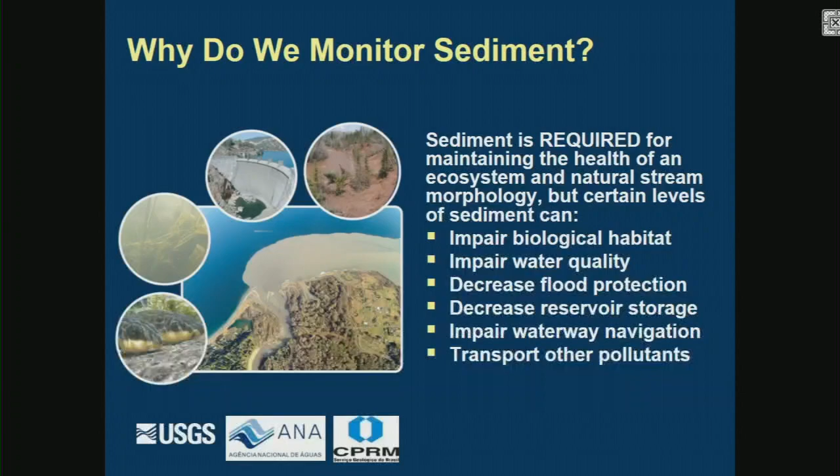On the other side, too little sediment can also cause problems. We can lose agricultural land, we can lose land used along our coasts, things like that, if we don't have enough sediment delivery to those systems. So understanding the amount of sediment can be very important for answering a lot of these science questions. These are the common types of problems that we have in the U.S. that create a need for monitoring sediment to address.

Sediment can also cause a lot of damage. It's been estimated that sediment-related impairments in North America total over $20 billion annually, so it's a common problem. I'd say most of this damage is associated with the loss of storage in our reservoirs, so infilling of our reservoirs.

In the U.S., we work very closely with other federal agencies, other state agencies, and our partners in the federal government, two of them mainly the U.S. Army Corps of Engineers and the U.S. Bureau of Reclamation.

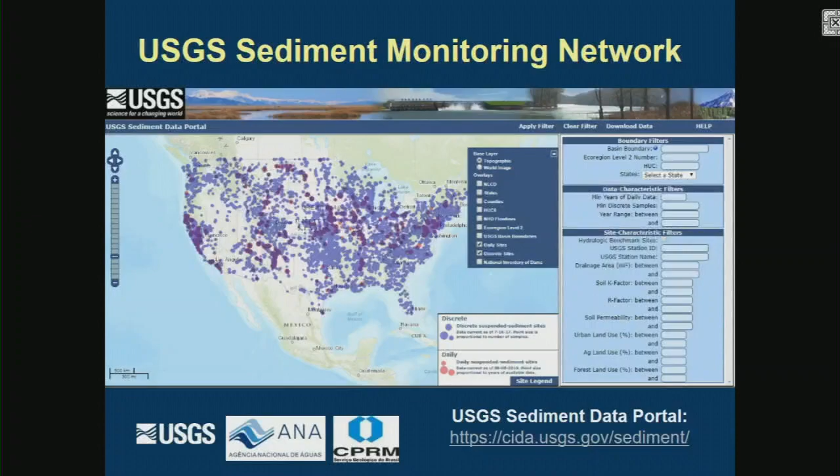Okay, so the next few graphs I'm going to show you are showing kind of the types of samples that we generally collect. And this is divided by decades since we've been collecting sediment data. The graphs I'll show you go through the last full decade, 2000 through 2009.

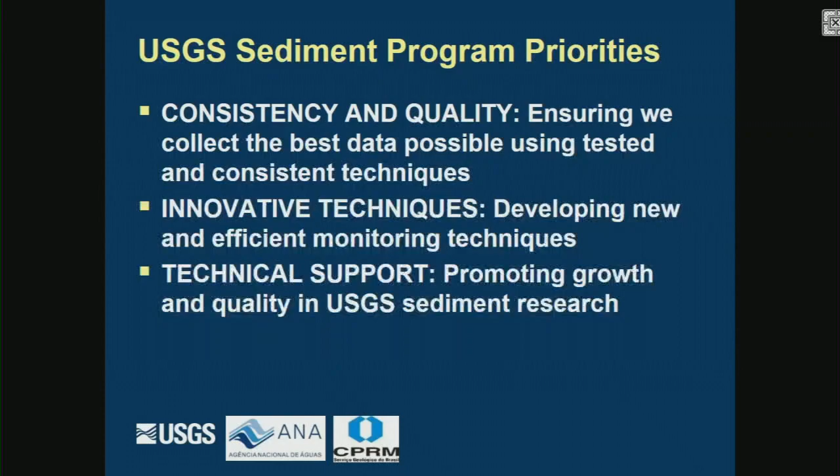Tim will talk more about the Federal Interagency Sedimentation Project, or FISP. This is a very important part of our priority to promote consistency and quality. The FISP was developed in 1939 to standardize and unify sediment data collection across all of the U.S. government agencies that were collecting sediment data.

It has been primarily focused on developing samplers. All the samplers we talk about were developed and promoted by the FISP and tested by the FISP, and also new monitoring technologies and new approaches for measuring sediment are also a focus of the FISP. So we all talk about FISP approved samplers—Tim will talk more about those later. The FISP chief right now is Tim Straub, so you'll get more information from him on this program.

So we have a website, linked here. Another piece of our mission to promote consistency and quality is to develop policies and standards and methods that we publish and make available to everyone. Wallace talked about this, that everything we do, we try to publish that method so it's accessible to everyone to follow or to comment on if they want.

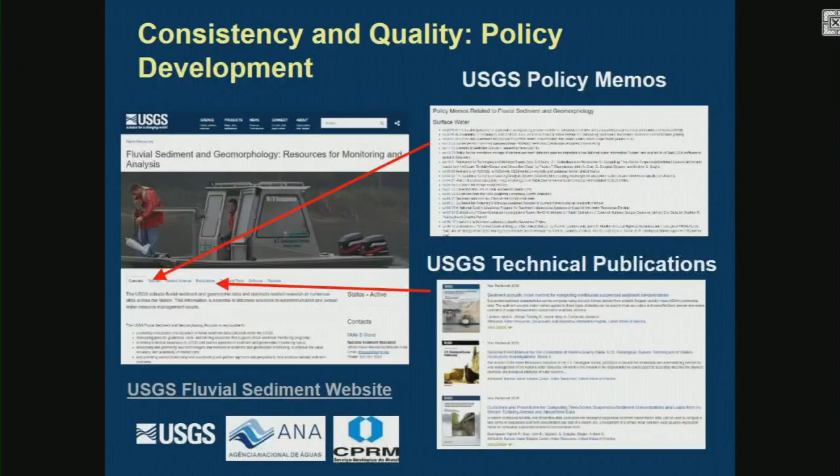Related to that, many of you know about the sediment compilation document we submitted as part of our agreement with ANA and CPRM last year. This is a summary of all the key sediment publications in different categories. Walson talked about this yesterday, showing that you all had downloaded a lot of those resources and made them available. So you should have access to this document—if not, let us know. It gives you links to all of those major resources that we feel are the most important ones to follow for our sediment data collection practices.

In recent years, our partner agencies have been wanting more sediment data at a higher time resolution—hourly sediment estimates or estimates every 15 minutes, things like that. They want that information to be better quality, cheaper, and they want it now, in real time. That's difficult with sediment sampling.

Sediment sampling is time intensive. It takes a long time to collect a sample. It's hard to get personnel and staff out there on the river sometimes, especially in high flow situations where it can be dangerous. Collecting a sample every time sediment data are needed is very difficult and very expensive, as you all know. So we've started looking at other approaches for getting sediment estimates when we can't collect a sample.

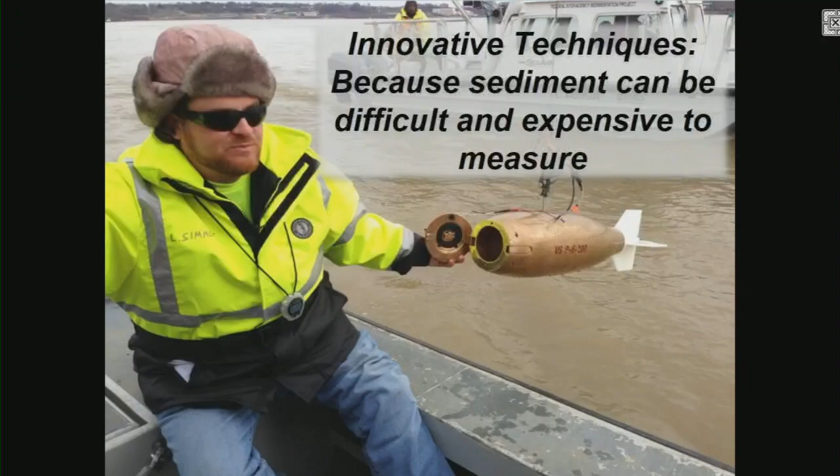There were sediment samples collected, so full EWI or EDI cross-section samples. They were collected about once per day over that event. For us, and probably for you, you would say, oh, that's a lot of samples. Daily samples over an event is something that we don't always get, so it's really nice to have that kind of information to see what was happening.

So yeah, those are full cross-section EWI samples. And the max that was sampled during that event was 250 milligrams per liter among those EWI samples.

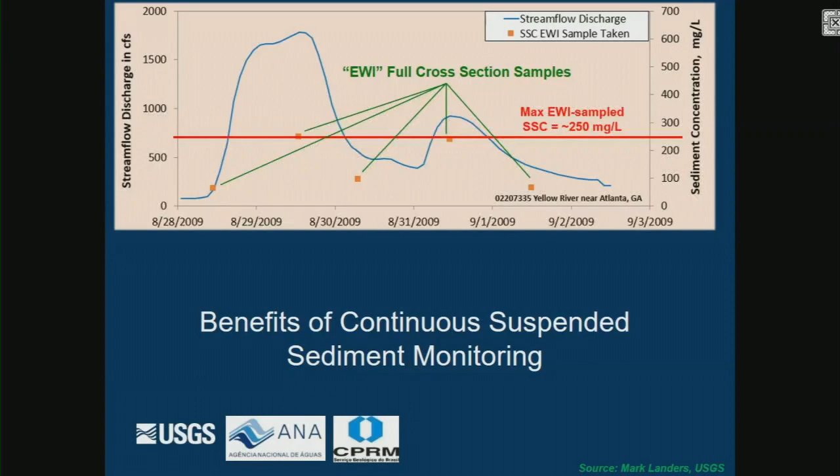So another thing that they had at this site was an auto sampler, a pumped sampler. How many of you are familiar with an auto sampler or a pumped sampler or have ever used one? Anyone? No, it's not common.

So it's like a barrel that sits on the stream bank, and it has a tube that goes out to an intake in the stream or river. The sampler has a pump in it, and it pumps samples from the river into the box, with a series of sample bottles within the auto sampler. It can collect samples while you're not there during a storm event, and can be activated based on flow at the site, water level, or any number of measurements. So they had one of these instruments at the site, and it collected data continuously during that storm event.

Okay, so these are all of the samples that were collected using that pumped sampler. These samples were corrected to the cross-section using an approach I'll talk about later called development of a box coefficient. So we relate the full cross-section sample to a sample that's pumped from the sampler, and develop a rating, a relationship between those two. At this site, they had done that over a range of conditions, and corrected the auto sampler data to what a full cross-section sample would be. We'll talk more about that later, but just know that these are the samples that were collected during that event.

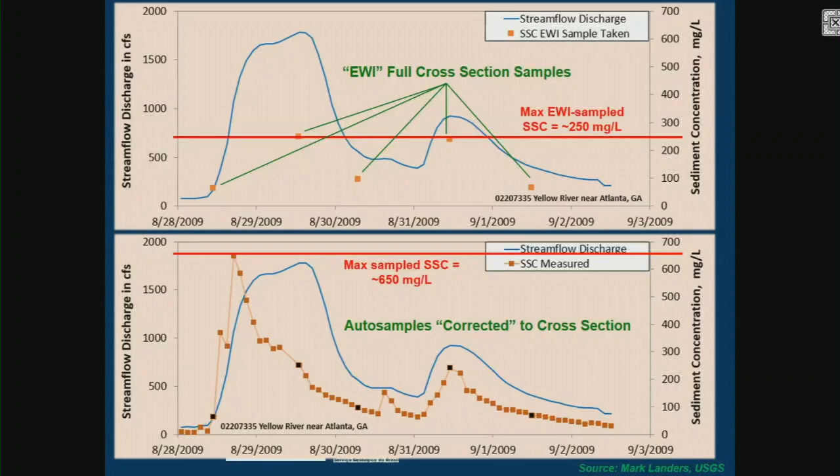As you can imagine, it's expensive to collect a lot of samples using an auto sampler because you have to analyze each one. So we thought, well, are there other things we could measure that are directly relatable to sediment concentration, but maybe easier to measure, and maybe not as expensive to use as collecting a lot of auto samples? Out of that came the concept of these innovative techniques called surrogates. This is a big focus for us in the USGS, using surrogate technologies. So I'm just going to briefly talk about some of the ones that we use.

So for suspended sediment, some of the most common surrogate techniques that we employ are installing acoustic velocity meters that are mounted in a fixed location, mounted horizontally in the river. Those instruments send out sound waves into the water, and those sound waves bounce off of sediment in the water. The instrument listens to the reflection of those sound waves, and the stronger the reflection can be related to more sediment in the river. So that's one technique that we use. Turbidity is another common technique that you all are familiar with.

There are some laser diffraction instruments that can be mounted in the water that we can use to estimate suspended sediment concentration and grain size distribution. Another technique we use at sites with really high concentration is called pressure difference, where we install two pressure transducers or water pressure monitors at a fixed distance from each other, and we record the difference in pressure between those two and relate that to the amount of suspended sediment concentration.

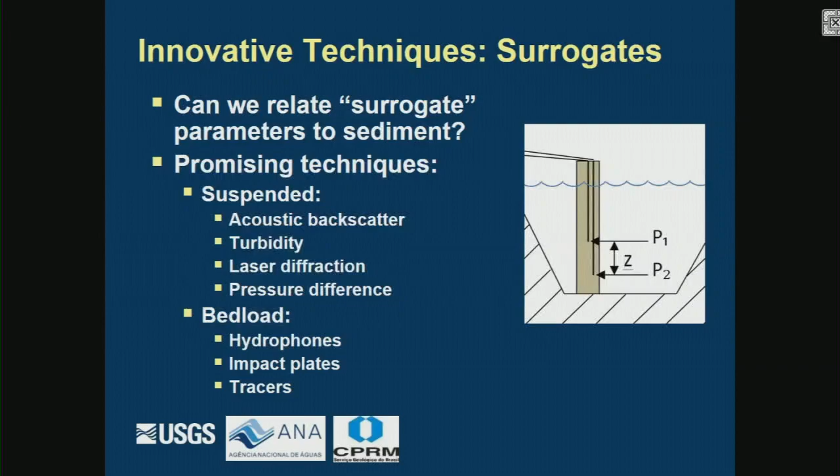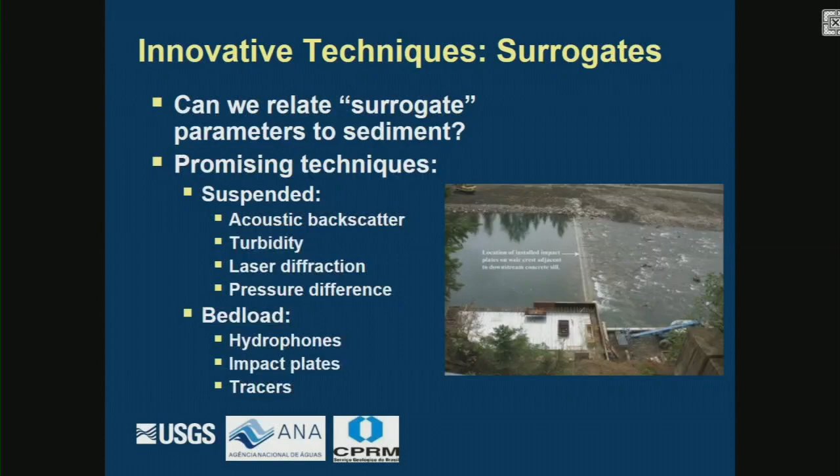For bed load, we have worked with our partner agencies and done some different types of tests. Hydrophone is one, an underwater microphone that listens to sediment particles bouncing against one another. Impact plates are something you install in a river that records the sounds of sediment hitting that plate along the bed. And then also tracer materials, either dyed sediment particles or sediment particles with little radio transmitters in them, and we document the movement of those particles and relate that to bed load.

So these are some of the techniques that we are using and testing in the US.

Back to this example of the Yellow River. At this site, they had deployed two surrogate instruments: an acoustic velocity meter and a turbidity probe. They looked at the data recorded from those instruments during that storm event. In the top graph, the purple line shows the backscatter response during that event, with the sediment samples also shown. The bottom graph shows the turbidity response over that event, again with the sediment samples shown.

What you can see is that these two instruments followed a shape in the response very similar to the actual sample concentrations. This shows us that these could probably be more directly related to sediment concentrations and used to estimate sediment, and they would probably give us a better relation than just using flow. If you remember, the flow hydrograph did not very closely match the patterns we saw in concentration from the samples. So we're starting to use these kinds of techniques more and more to give us sediment estimates at a much smaller time scale.

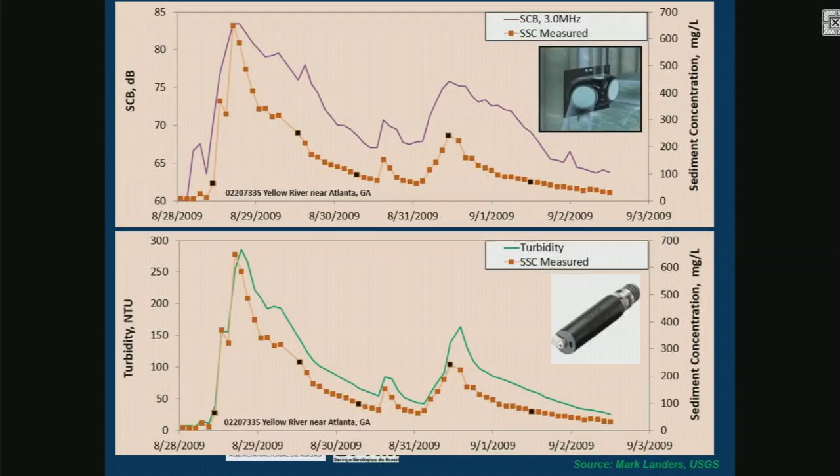We're using these surrogate technologies, as I said, to estimate sediment, but we're also using them to estimate things associated with sediment, like nutrients—nitrogen or phosphorus in particular—bacteria, and some other water quality parameters like metals and things like that.

Another thing we're starting to do more of in the US is called sediment fingerprinting. A lot of our partner agencies, when they want us to monitor sediment and develop a sediment budget, want to better understand where sediment is coming from so that they can try to target that source and control sediment closer at the source. It may be more cost effective to manage sediment where it's coming from than to try to remove or control it far down in the watershed, where that may be more expensive and difficult.

Sediment fingerprinting involves, if you have a watershed, identifying the possible sources of sediment within that watershed, visiting each of those sources and collecting a sample. So in this watershed, some potential sources of sediment might be erosion from the stream banks, runoff from agricultural lands, runoff from dirt roads and construction areas, areas that may have been subjected to wildfire burned areas, and there may be some key geologic features that need to be sampled as well.

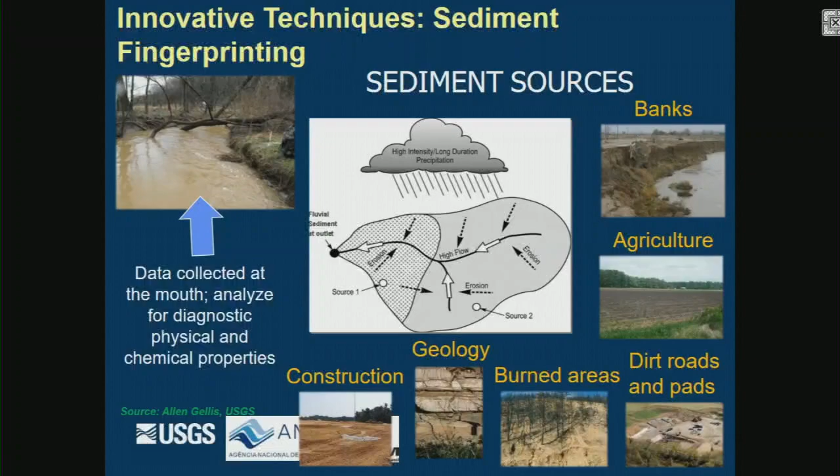So for technical support, we provide a lot of support for implementing some of these innovative techniques and helping people do this in their offices. But we also teach a lot of training courses, including week-long courses similar to some of the content we'll cover this week. We have a week-long class specifically on sediment data collection, and another one on using large samplers like the D99 on large rivers and special considerations that need to be followed. Mike will talk more about that later.

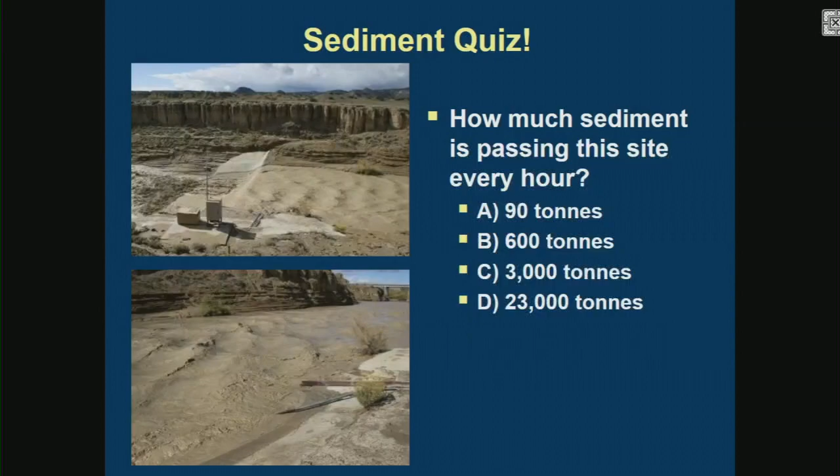Okay, so back to the sediment quiz. How much sediment do you think is passing this site every hour? How many people think it was 90 tons? How many think 600 tons? How many think 3,000 tons? How many think 23,000 tons? You guys are good, the answer was C, 3,000 tons. Nice job. This is a site on the Rio Puerco, I think the Pork River, in New Mexico.

And the concentrations are so high that it makes surrogate technologies difficult, and sometimes makes sampling difficult. It's really thick stuff, and the phrase has been used that it's too thin to plow and too thick to drink. So it's really, really thick. The concentrations at this particular point in time were about 47,000 milligrams per liter, but this site has seen concentrations up to about 400,000 milligrams per liter.

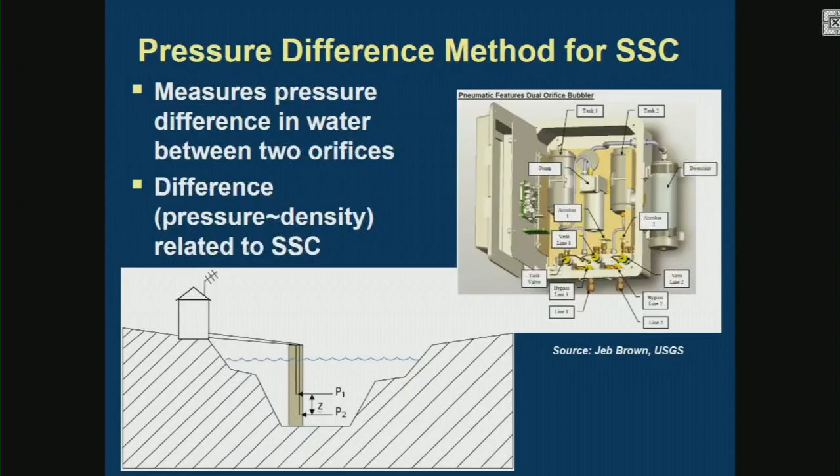So in summary, we're actively supporting and promoting sediment monitoring across all of our stations and networks in the US. We're promoting new ways of trying to get more sediment data more cheaply, quicker, and more efficiently. We're dealing with that in challenging environments, and we're providing that information at higher temporal and spatial resolution than we previously thought were possible. So we're trying to do that at our networks and provide support for that.

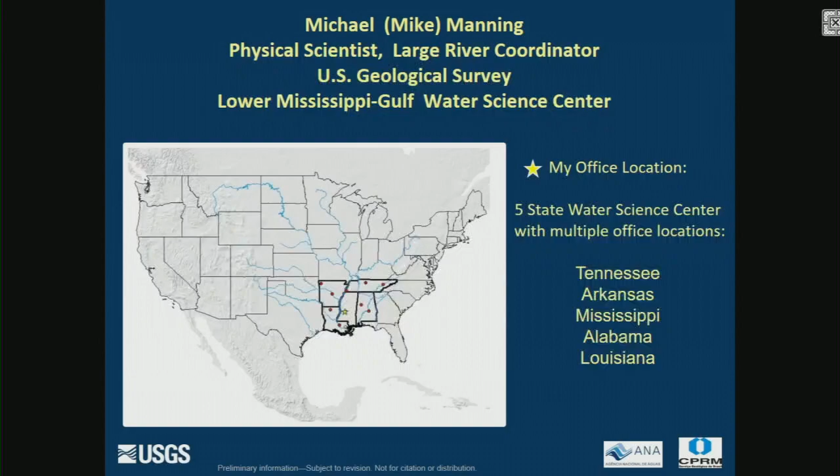So I have a few previous careers that you may find amusing. I don't know, some of you may not. Apparently from some of my friends, I've been the coach for the St. Louis Rams, and I look a lot like Jeff Fisher. As you can tell, I guess maybe I do with sunglasses and some serious expressions, but I'm afraid not. Another career I guess I've been associated with was Smokey and the Bandit. I've had several friends and coworkers say at times I tend to look a little bit like Burt Reynolds, maybe in my younger days without the gray hair.

But anyway, let's talk about the science. Let's get into site reconnaissance. We could talk about this all day, but I'll try to be brief and go through some of the specifics I've learned over my career. This is probably one of the most important first steps you take in establishing a new site - to get out and look at these sites, see what you're looking at, some of the different features. It takes a little time, but in the long run, this will pay for itself.

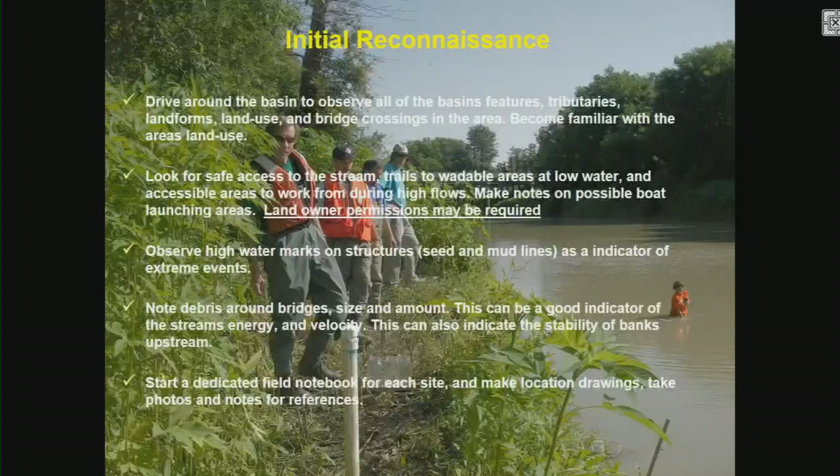So in doing this, you need to devote some time to drive around the basin, to become familiar with the different features, the tributaries, the landforms, things going on as far as land use goes, the bridge crossings in the area, and so forth. You need to look at access to the stream and where you can collect your data, the wading sections, low water areas, and even access to the site during high water. Make notes on all of these things and carry this with you.

You may need to have landowner permissions to access some of these areas. I know in the U.S., a lot of times we have to go talk to the local landowners before we go onto their property to make sure they're okay with us doing this type of thing.

You need to observe the high water and the flood marks, the seed lines, the mud lines on the piers. It'll give you a good indication of some of the extreme events. You need to note the debris around the bridges, how much, the size of it. This can be a good indicator of the energy of the stream and some of the past events going on. I know in the south, we have several bridges with a lot of log jams, tree jams that get jammed into the bridges and things.

You need to start a dedicated field notebook, of course. A lot of you may already do this, but start this notebook and make notes of what you see and the things you are observing.

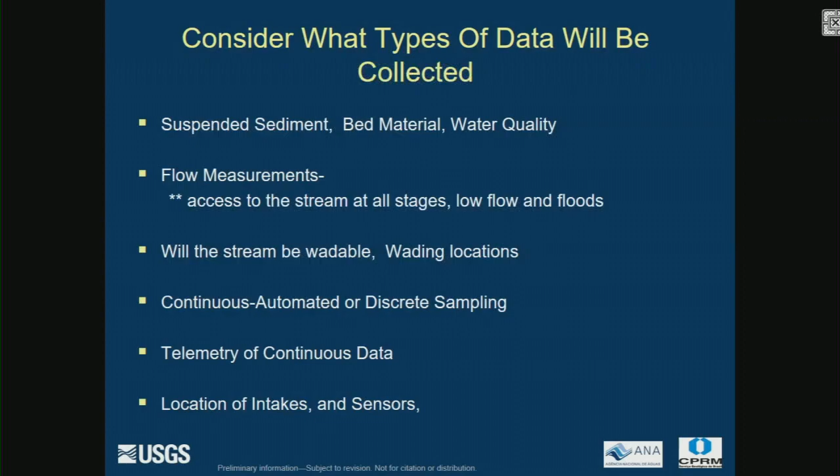And the location of intakes or sensors if you may be installing some sort of continuous monitoring. If you'll be able to connect that to the bridge, if you may have to run this down the bank, I'll show some pictures later on of these.

So, site selection. I've come to find out, and I know several who have installed gauges and done this type of hydrology and monitoring, that the perfect site is not to be found. But if you do the recon beforehand, you can save yourself a lot of headaches in the future by reducing these uncertainties.

You need to look at the tributaries upstream of where you're going to be sampling, and whether that will affect the data and how. Excessive bank erosion may introduce bias to your samples and may not indicate the full basin characteristics, so you may want to adjust your sampling location to avoid that. Constrictions like bridges, dams, dikes, and flow deflectors can all greatly affect suspended sediment transport. So consider all things and put in the time and effort to do the reconnaissance.

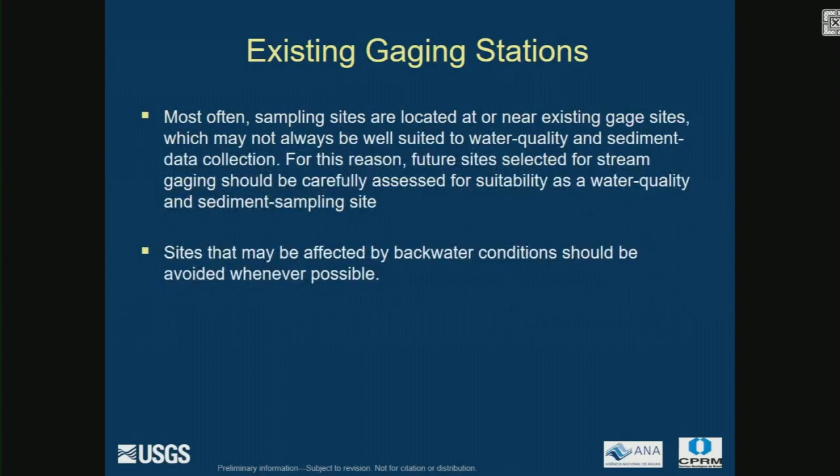So, sample collection access points vary according to site. They can be close to the bridge. I find that usually in most situations, bridges tend to have deeper pool areas because of the scour they may produce upstream or downstream. Most of you are familiar with the geomorphology of streams—we have pool areas, the thalweg meanders back and forth, point bars, and cut banks at various locations.

So let's say a bridge is here or here—you may want to look upstream and downstream. If there's a trail, there could be a crossover where the stream becomes wadable. From the bridge, it may not appear this way, and it may seem like slower velocity simply because the water is deep.

But with a little recon, not hard walking or trail cutting, a better site could be found than just sampling at the bridge consistently. There's a good example on a site that we now have operated over 27 years as a sediment and water quality site for one of our national programs.

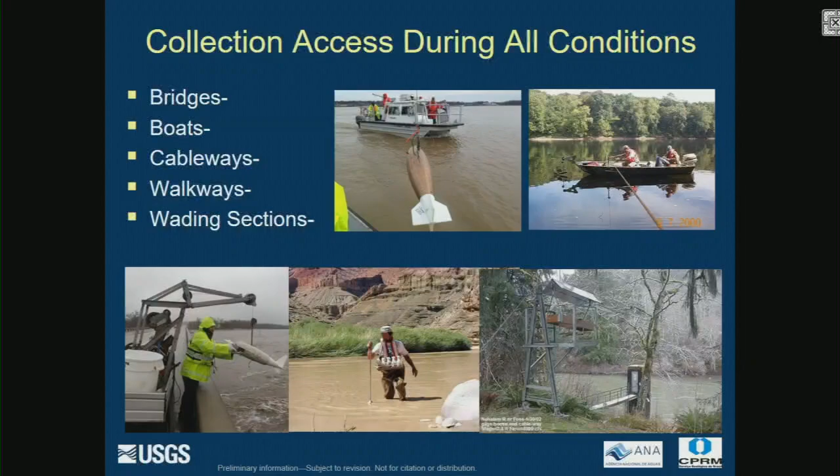In other situations, you just have to do what you can do. But if you do the initial recon and look at some of the higher flow indications, you can have your gauge built up on a platform and try to alleviate or eliminate some of these challenges.

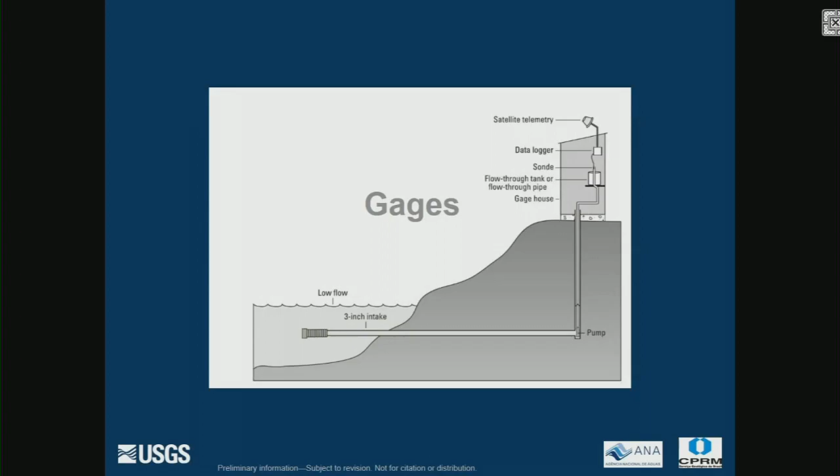Standard gauges in the past were basically designed in the early 60s, 70s, even in the 40s, where there was some sort of intake to the stream. This is a general USGS gauge with a concrete structure, generalized with a pump house and so forth, although this one has telemetry, a data logger, and maybe a flow-through pipe.

And so then the process was the gauges were built on piers and pipes were put in for stilling wells and floats that used encoders that then transmitted those numbers to a data logger. But in today's day and time, this century, more and more of the gauges have non-contact sensors, radar sensors that can ping the surface, and so we're getting out of the water. And more compact data collection platforms, batteries, antennas and solar panels and things. And so there's been an evolution of gauges.

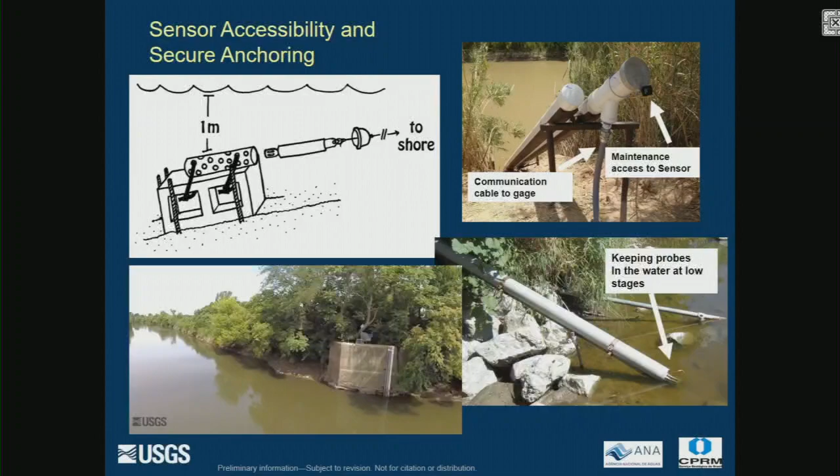There may be a challenge here with the sunlight on the solar panels, so I talked a little bit about that, about making sure that you've got access to the sky. Then there are the larger channels, which come with larger problems.

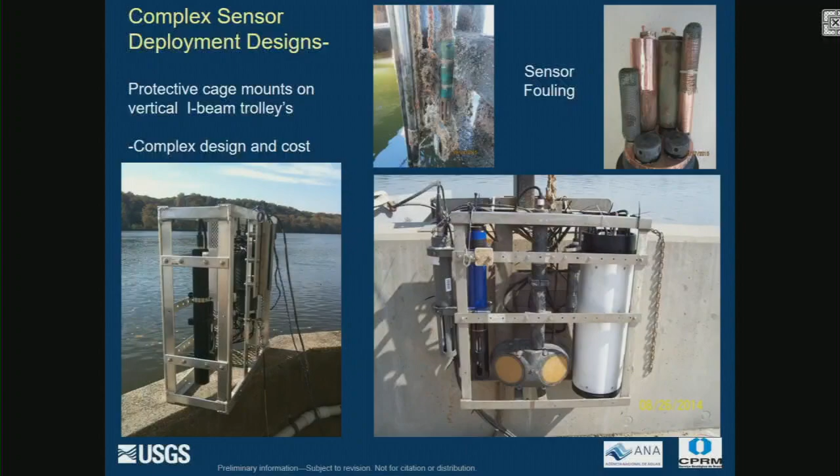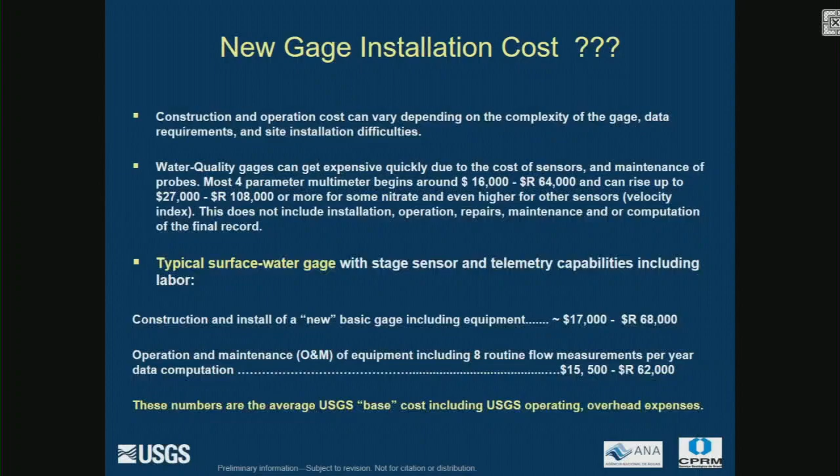The new generation of sensors coming out are allowing us to get out of the water, non-contact, and really get off the bridges and so forth. As you well know, the Dopplers and some of the tether boats we're using allow us not to have so much equipment on the boat, just a laptop and a tether boat, and within about 30 minutes make a complete discharge measurement.

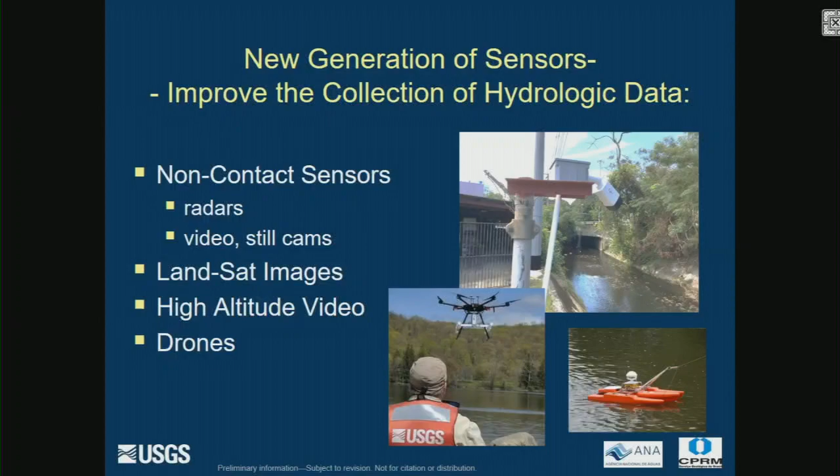Of course, drones, you all are very much aware of those. But these video and still cameras that our surface water networks are researching, I don't have particular information about them, but they're taking pictures of control sections of the river, so they can look at the movement of sand and point bars as they're coming down the stream. This helps them work the data and adjust the ratings and shifts. Some of the video cameras are actual live cams.

We had a U.S. Border Patrol drone fly that site at about 35,000 feet. They videoed the site as we had ground-based boats making Doppler measurements, and video cameras capturing the surface velocity. They take the surface velocity, where there's a normal relationship: highest velocity at the top, tapering down to lower velocities toward the bottom of the channel. They were able to use thermal infrared video co-collected with the ground-based data.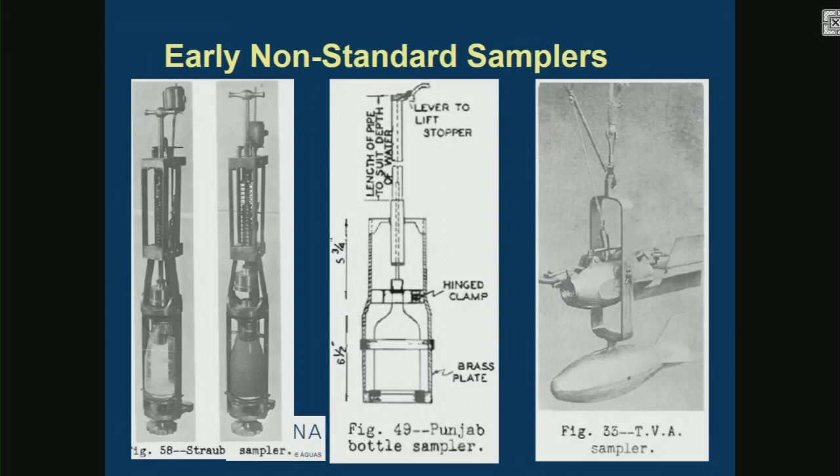There's a few more samplers, again more of the open bottle type, maybe starting to look a bit more like what we use today. These are all documented in FISP reports on our website.

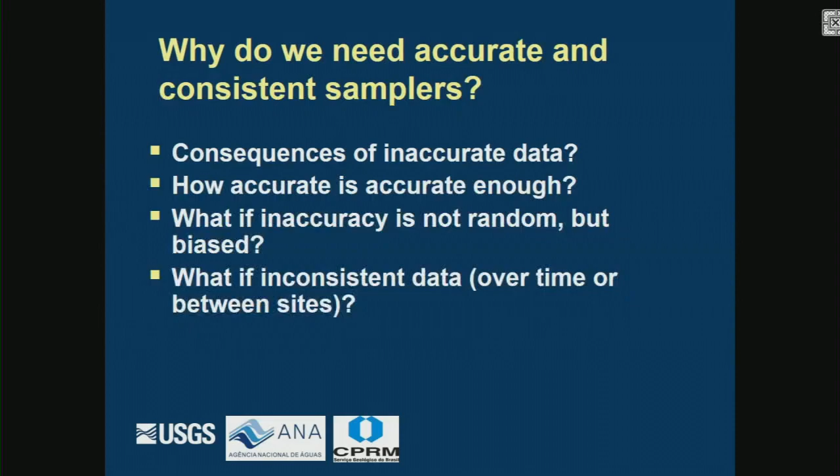And then these are more for measuring bed load, which I'll talk about in my afternoon presentation. So in about 1939, all the agencies got together thinking that to compare data across agencies throughout the U.S., we needed to come up with more standard samplers. That's when the FISP was created.

You can see here, in the presentations you have available, this is the current FISP web address, and you can go there and get a multitude of things.

One of the main things you can get, what Walzan showed, is all the work and reports done on samplers. A lot of my current work is focused on these surrogate instruments. We have a page on the website called Research, and if you look there, it outlines some of the research we've done in recent years and continue to do, hopefully partnering with more people like you and others from other countries as we advance our technologies. But the samplers are going to be around for a long time because we need ways to calibrate those, since they're usually site-specific calibrations, so you need samples to calibrate to the different new instruments.

For the samplers, I mentioned I work about half-time for FISP. There's another person at our hydrologic instrumentation facility who works about 30% to half-time on the more physical samplers, maintaining them, testing them, and that's where we sell them.

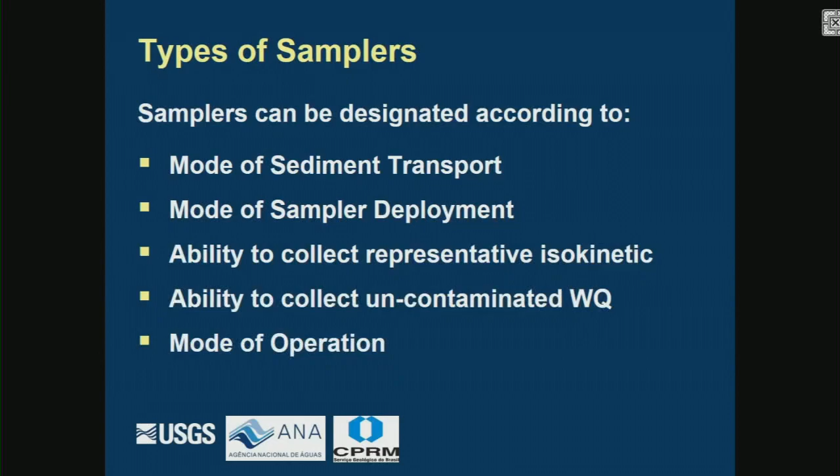So, types of samplers: there's the mode of sediment transport, the mode of sampler deployment, the ability to collect representative isokinetic samples, the ability to collect uncontaminated water quality samples — that became a big thing for the USGS in about the 1980s — and the mode of operation. I'm going to lay out the samplers in some of these different categories, and then we'll talk about them in more detail.

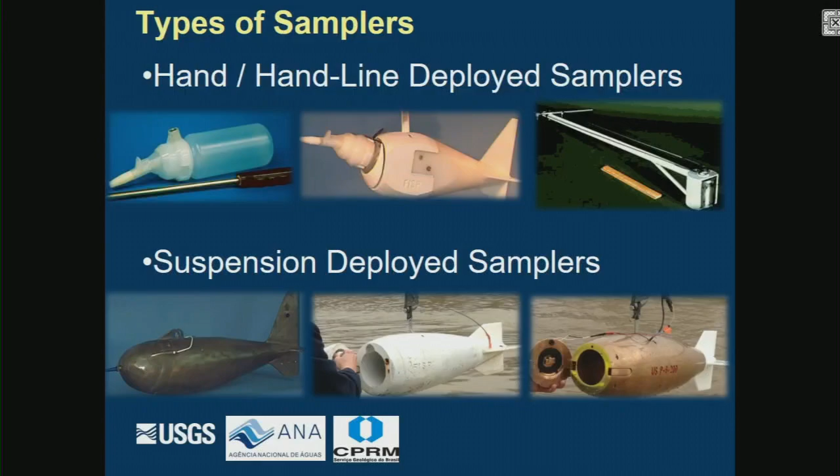So then the types of samplers - the suspended sediment ones over here, you can see the metal casings, and like I mentioned, in the 1980s they started developing some water quality ones. These ones with the white epoxy, again, to get away from the trace metals.

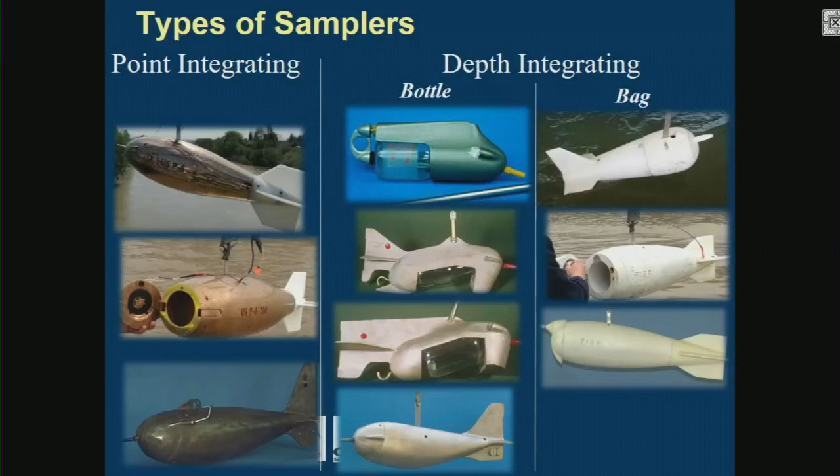Point integrating versus depth integrating, with the bottles and with the bags.

So in the FISP series of samplers, we have US denoting United States, D for depth integrating, which we've got that one under control it sounds like, and then P for point sampler. The H is the handheld or hand line, and then the year, and then bed load or bed material.

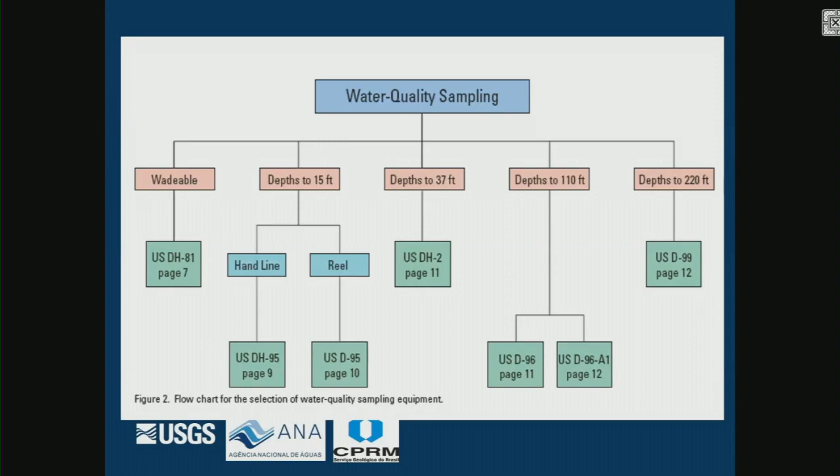And then for water quality, same type of flow chart, decisions on your different depths. As you can see, there are some of the same samplers on this one, especially the newer ones that can do water quality.

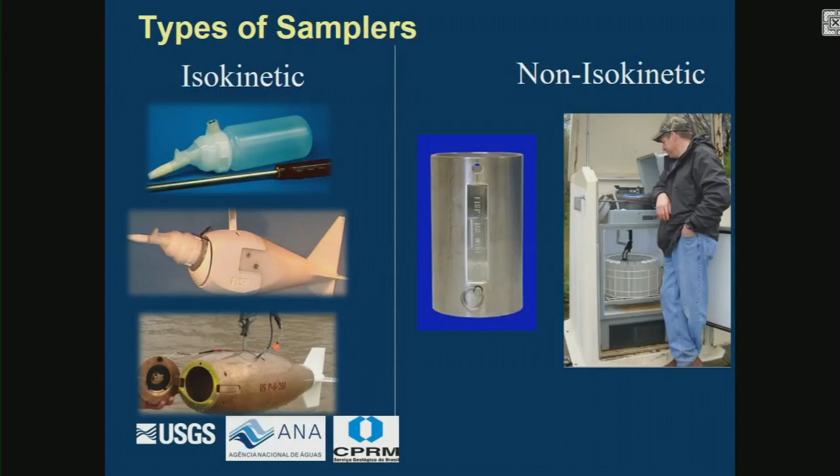So isokinetic. Walzon really hit this hard yesterday, but I'll just read this: to obtain a sample in such a way that the water sediment mixture moves with no significant change in velocity as it leaves the ambient flow and enters the sampler intake. It's a critical step toward collecting a representative sample.

And Mike, did you want to talk about those nozzles that you brought? I can, now. I think it would be, yeah. So I can usually talk loud enough without a microphone because my voice carries. They might need it for the recording. Oh, they need it. Yes.

All right, so this plot here is something I want to spend a little time on because I think this will answer some of the questions from yesterday. What we have on the y-axis is the error in concentration, and on the x-axis is the intake efficiency, so that's the mean intake velocity over the mean stream velocity. So we want to be right at 1.

So there's 0 error in concentration, and then on this side there's a positive bias and a negative bias. So what does that mean? On the positive bias, that means we're getting more concentration in the sample than we want. And the negative bias is we're getting less concentration than what we want.

So the neat thing about this, and there's an old FISP report on this, and this is an updated modern version that was in a different publication, but what it shows here is, if we have less efficiency, so we think we're getting more sample in our bottle than what we want, it's a pretty big deal for sands. Not so much for the silts and clays.

So just some statistics here. The bias in suspended sediment concentration for coarse sand is about plus 10% for intake efficiency of 0.75 at 5 feet per second. So we're backing off here, about 1, 0.9, 0.8, 0.7, so we're right in here, and we're getting about 10% error. And the bias in suspended sediment concentration for less than 0.062 millimeters, which is the fines, the silts and clays, is less than 10% for an intake efficiency of 0.2 at 5 feet per second. So that's way over here, and we're still less than 10%.

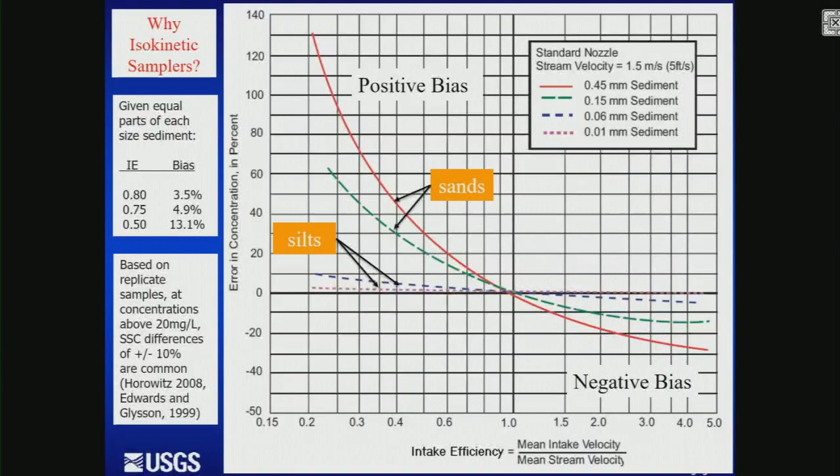And then kind of a separate statistic, but just in sampling in general, based on replicate samples at concentrations above 20 milligrams per liter, suspended sediment differences of plus or minus 10% are common. So if you go across the river more than one time taking samples, there's some error just in the sampling itself. So then you put that on the backdrop of the bias that you get for the intake efficiencies, and you make decisions as an agency of what is acceptable.

So for non-isokinetic conditions, if sand has been shown to be negligible in prior analysis of samples collected at sites under similar conditions - take the example of your bag sampler, in low velocities it doesn't do very well for intake efficiency. But at those low velocities, how much sand is actually moving is the question. So if in those velocities you can show it's mostly silts and clays, your intake efficiency being a little bit lower may not be inducing as much error as you might have originally thought.

Was that useful? Are there any questions on that? I know it's kind of a complicated plot and things. Maybe stop for questions at this point.

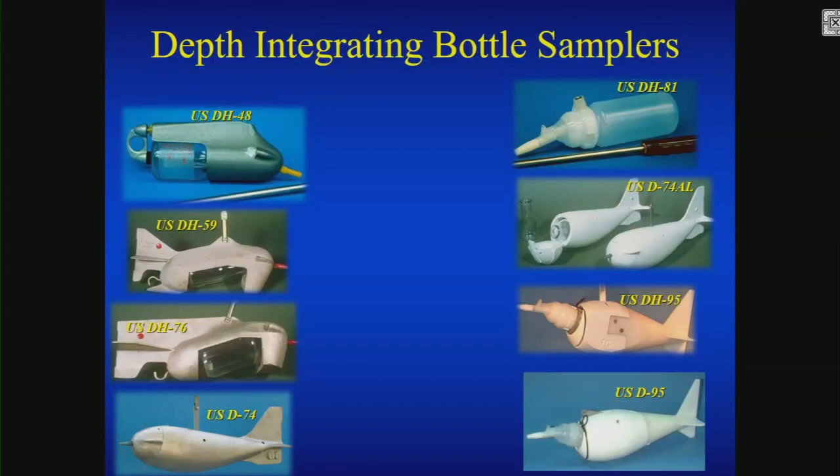All right, so moving on, again, depth integrating, you got the bottle samples, various different types. This is an important point Wazan pointed out yesterday, that as the water's flowing in, the air is exhausting, so that gives you a limit on how much water you want to fill. So for a 1 liter bottle, as you were saying yesterday, it's 800 milliliters.

And this is the transit rate. I'm going to go through this one - it's kind of a modern depiction of it, but I kind of like the old ones better because they depict it well. So we have two problems with the bottle samplers: the approach angle limit and then the compression depth limit. For the sake of time, I won't go into that - Wazan covered that really well yesterday. If there's any questions, we can talk more about that.

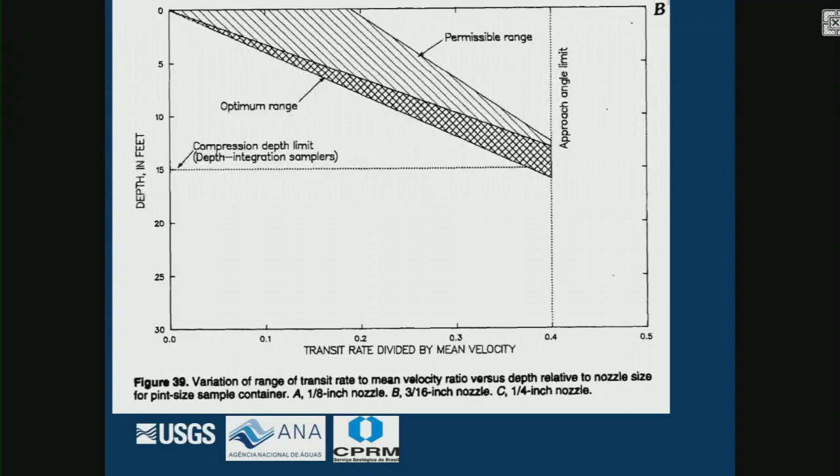Again, looking at the different nozzle sizes and things, you may not be able to get all the way to the 15 feet, the compression depth limit.

So then just going through some of the different samplers and looking at the characteristics, the D95 is just an example of one of the ones with the bottle samplers that has that 15-foot depth problem.

So then we move to the bag samplers for deeper depths, and you get away from the compression problems because it's a bag that starts with ideally no air in it, which is what we're shooting for. And the bag fills up, and you can take it to deeper depths.

But I do want to stay a little bit on these. This is the intake efficiencies that were done for developing the D96. As you can see on the x-axis, we have ambient velocity from 0 to 9 feet per second, and inflow efficiency on the y-axis. At these higher velocities, we're doing okay, but then it really starts to drop off as you get to the lower velocities, and we don't recommend using it below 1.5 to 2 feet per second.

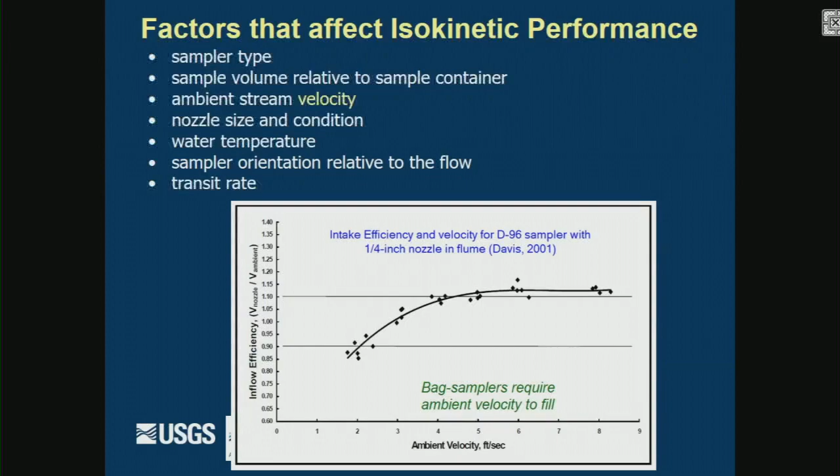As Michael will talk a little bit more later on the logistics of when you're below those conditions. But as you can see, for these conditions here, we're between 0.9 and 1.15. And if you take into account the graph I spent some time on to show you the accuracy of the concentrations at those ranges, we felt comfortable releasing the sampler in about 1996.

So now again we have intake efficiency on the y-axis, and sample volume on the x-axis. As the sample volume gets larger, the intake efficiency gets lower. That would probably be true for pretty much any bottle, even the bottle samplers, but with the bag, this shows what happens specifically. Still, you're within a 0.9 to 1.1 range.

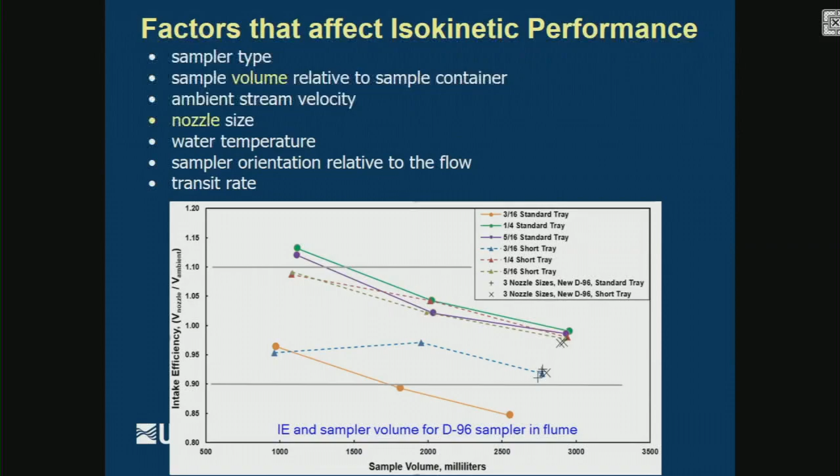So what do we do to know what this intake efficiency is in the field? It sounds like with your program you do this for every vertical—you get an intake efficiency test. You know the ambient flow velocity, the sample duration, and the nozzle size, so you know what the sample volume should be, and then you compare that to what you actually get, and that's how you get your intake efficiency.

We have a policy saying that we want people to do this each time they take a sample. Maybe we'll end up backing off that a little bit as we get more information on the bag samplers and more testing. There was some concern, like with the colder temperatures and the lower velocities and things.

But beyond that, we were getting some strange lower intake efficiencies for higher velocities that we weren't really expecting. We think—and Mike will talk a little bit more about this later—that it ended up being the nozzles we're getting from the manufacturer, and the tolerances on those criteria, along with some manual adjustments to the nozzles that FISP historically did but we weren't doing as of maybe 10 or so years ago. Anyway, Mike's in the thick of all that, and he'll talk about it a bit more in his presentation on large river sampling.

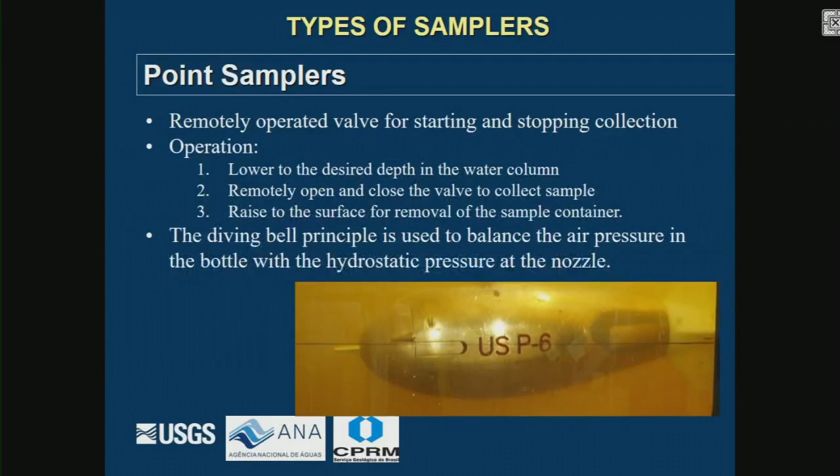It uses this diving bell principle, which I have a little experiment here I'll do and show, because that's a little bit confusing to people. But just to show the schematic of the sampler first, this is the top view and this is the side view.

So as the water comes up, there's this compression chamber in the sampler that's disconnected from where the bottle goes. The water comes up and compresses the air in the compression chamber. So why would we want to do that?

We lower this point sampler and it's closed, and we lower it to 30 feet. So you've got this hydrostatic pressure at the nozzle that is really high, but we have to have some way to compensate that in the bottle, or otherwise when we open up the nozzle, the water is just going to gush in. So what happens with this - and I've got a schematic that shows this a little bit better -

this is the compression chamber, and when we lower it down, the nozzle is closed, the exhaust is closed. So no water is getting into the sample container, although we have this compression chamber which is open to the bottom. And then the water can come up a little bit in there and compress the air at the nozzle, because it's connected through this tube to the sample container.

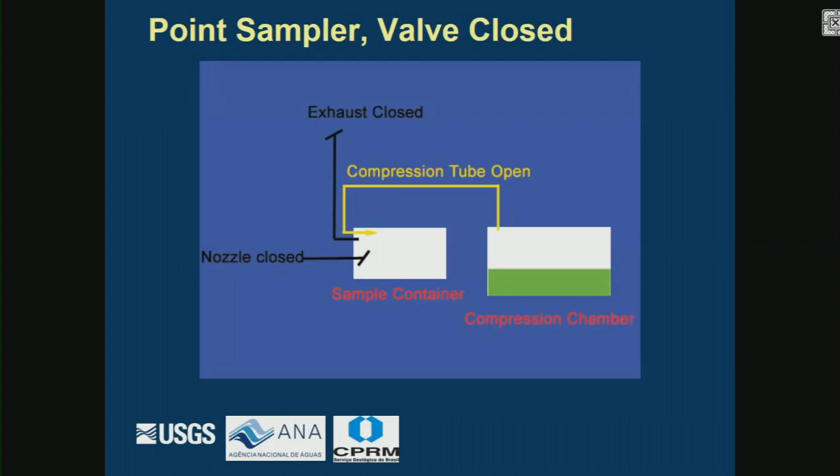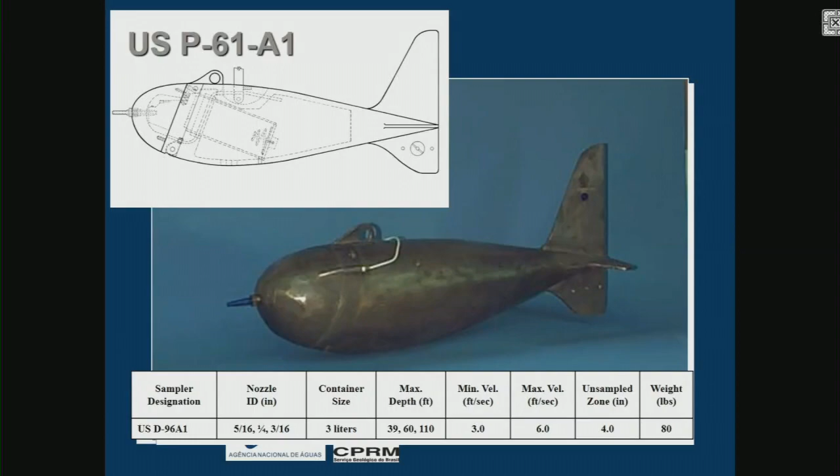So we have a few different samplers: we have this point sampler, we have the P61 - 1961 technology - and as you can see here, there are lots of parts, lots of things that can go wrong with the sampler also. It works really well, but it's a little harder to maintain. There's a newer version called the P6, so 2006, and as you can see, quite a few less parts and easier to maintain, obviously. But this is the solenoid that actually actuates that nozzle to open and the exhaust to open also.

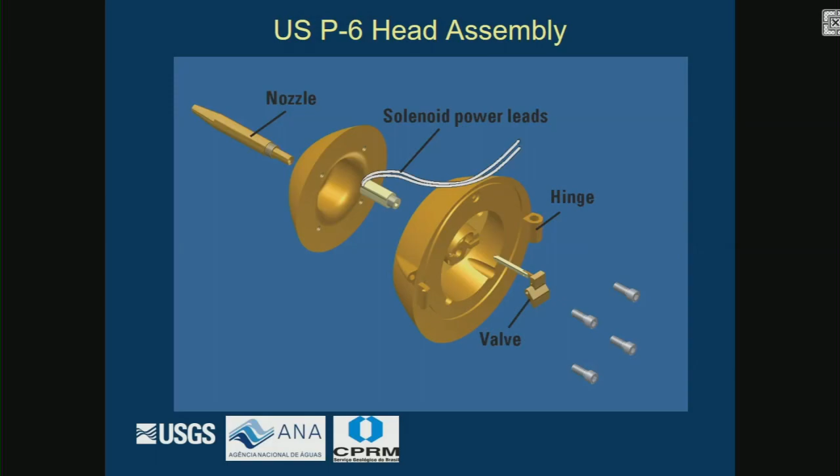There's a diagram of it, and then there's also a heavier version for deeper depths. Again, this is just a summary of all the different samplers. And with that, I'll take any questions.

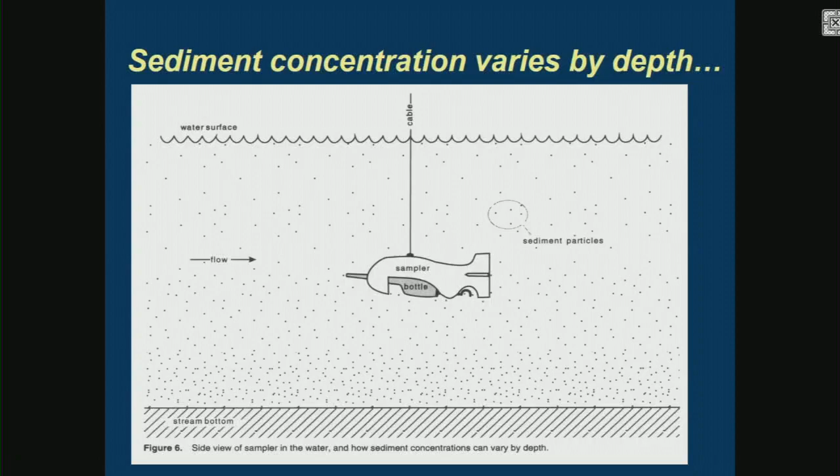There's also commonly variation across a river. Maybe you have a confluence, another river coming in upstream that's contributing different levels of sediment, and there's not complete mixing of the sediment by the time it gets to the site where you want to measure it. So you need to have an awareness of how that varies across the river.

We can see that at sites that aren't tidally influenced too, with different flow conditions—sediment may be transported in one portion of the river during one hydrologic condition, but that changes in another hydrologic condition. Having an awareness of how that happens is useful for determining the best approaches for measuring sediment.

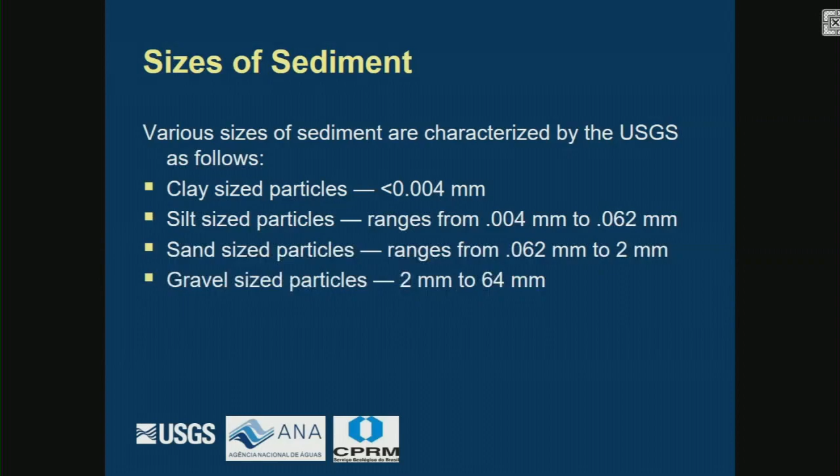So these are our general categories of sediment that we analyze for, and a lot of times we will analyze for a much more detailed gradation within each of these categories, particularly the sand-sized particles.

Considering all of that we talked about, all the site-specific considerations, we want to factor those in when deciding how to collect a representative sample. As covered well already, we have to get a sample—we can't possibly measure all of the water moving in the river. If we could, that would tell us exactly how much sediment was moving, but we can't. So we're trying to get a sample that represents what is going on in the full cross-section, using techniques that allow us to get the most representative sample possible.

I'll cover some of our sampling techniques. Some of the most common are depth-integrated, which we've talked about already. Point sampling and point-integrated sampling were also discussed, and we'll cover that again briefly. Sometimes we have to sample non-isokinetically by collecting grab samples or non-isokinetic verticals. We also sometimes use pumped samplers to collect samples from a single point in the river—those are all considered non-isokinetic methods. We'll talk about when each of those is appropriate to use.

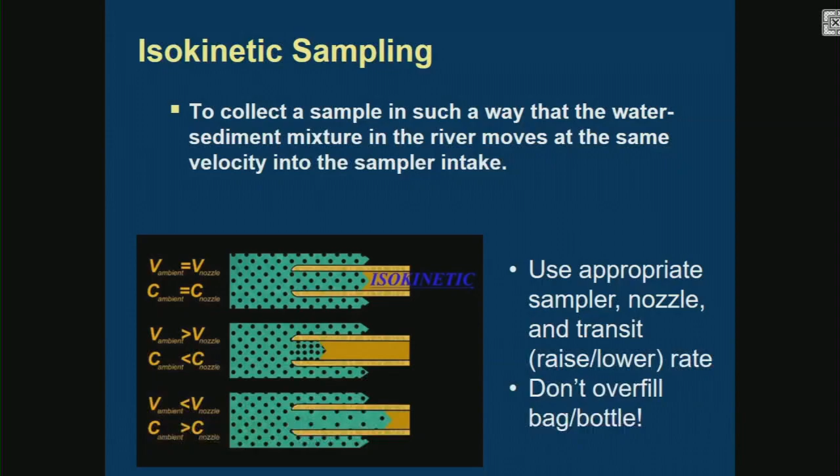As water is coming into your sampling container, the air in that container is being exhausted out through a port. So you need to make sure that port is not clogged, so air can escape as the sampler is being raised and lowered.

So that's one step. For depth integrating, we go to multiple locations across the channel, lowering the sampler through the water column to ensure representation of the entire water column, pulling it back up, and then moving to the next section.

So the most common techniques that we implement with the depth integrated techniques are the EWI, the EDI, and then there are times when we collect a depth integrated sample only in a single vertical, and we'll talk about that.

So equal width increments. This is the procedure that we follow. We will divide the cross section into 10 to 20 sections of equal width. The first section is actually half of the width of each section.

So let's say we have a 100-meter river, and we divide that up into 10 sections. Each section is 10 meters. So our first station will be at 5 meters, and then the next station will be 10 meters beyond that, so 15 meters, 25 meters, 35, and so on. So the first section is just the most confusing, in that it's half the width of the section.

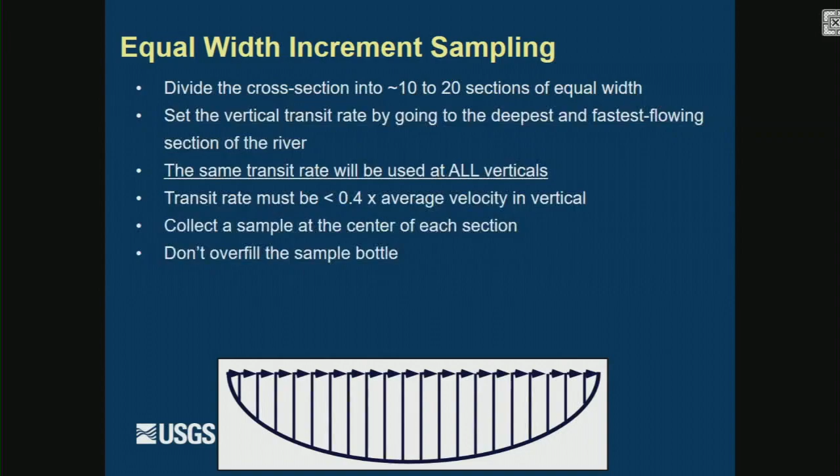A lot of times what we will do in USGS is we'll go to, say, the sections on the edges, and we'll raise and lower the sampler down. And when it comes back up along the edges where we have lower velocities and lower depths, we'll only get a very small amount of sample. So often what we will do is we'll go to the very next section and add to that same sample, and we'll get a little bit more. And then maybe go to the next one, raise it and lower it, and we'll add a little bit more. The problem with that is if you go to too many sections and you overfill the bottle, what do you have to do?

You have to go all the way back to the beginning, and start over. So that's a gamble. You've got to be careful not to do that. But that's commonly what we'll do. And in the deeper sections, we'll usually just treat each section as its own sample. We'll either cap the bottle and submit it as part of the sample set, or in some cases, composite it into a larger container on site.

With this method, as we've talked about, each sample bottle—because you're using the same transit rate, but you've got different velocities and depths at each location—the sample you collect at each section will have different volumes.

And with the EWI, the common practice is to composite all of those. We generally suggest that people collect replicate passes, so in what we call an A and a B pass, so 2 sets of EWI samples. It's not official policy, it's not an official requirement, but it's a recommendation to better understand the variability in a sample over the conditions over which you're sampling and the sampling practices. So that's a general recommendation.

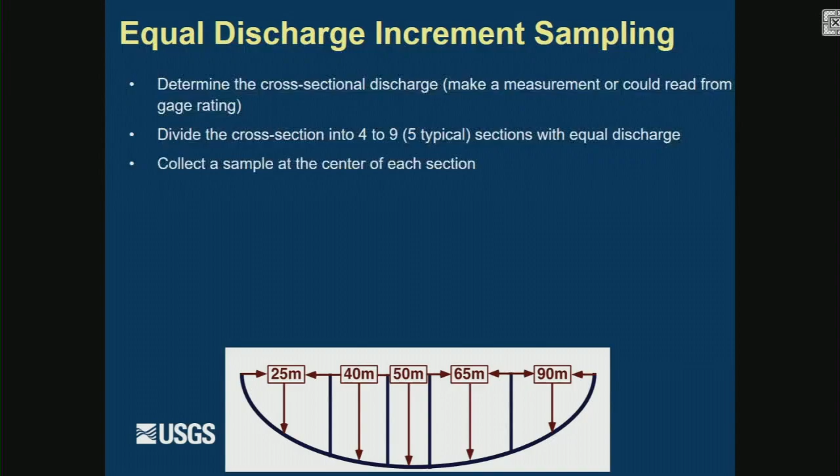You're going to collect a sample at the center of each of those sections. Whoa, I hit something bad.

Again, you don't want to overfill your sample bottle - that's important. But your transit rate will vary at each section based on the average velocity there and the depths, so at each section that will vary. You're going to be adjusting that transit rate to be appropriate for that. Ideally, as mentioned, if you do it right, you should get the same sample volume at each vertical. That's the goal. You don't have to with this method, but ideally that will give you the best quality sample.

Again, you have to be sure that your transit rate is less than 0.4 times the average velocity in each individual vertical. Then, if you've got the same sample volume at each, you can composite those samples, or you can always analyze each bottle individually. We'll talk more about the value of analyzing EDI bottles individually. With EWI, we generally recommend people collect 2 passes - 2 sample sets across the section - and compare the change or variability between the two, but it's not required.

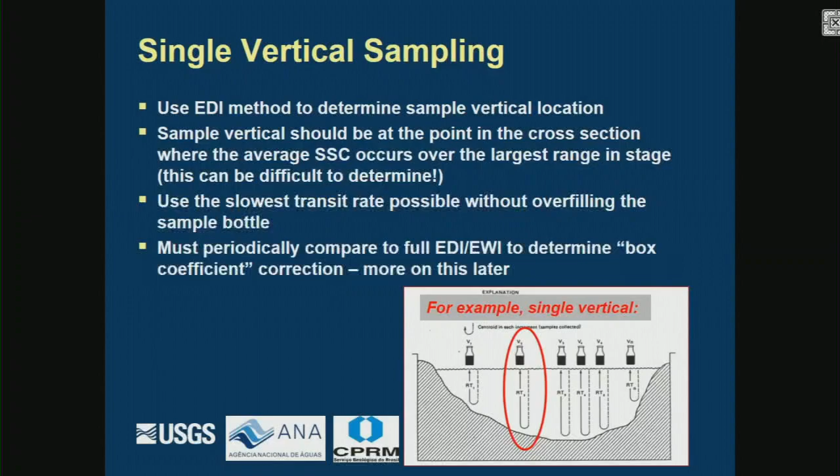Then what we do is take the value of that sample and periodically also collect a full cross-section EWI or EDI, and compare those two numbers. We'll do that over a range of conditions, and ultimately develop a relationship between what the single vertical is telling us and what the full cross-section concentration should be. We'll talk more about this later.

So I want to go back briefly to transit rates for depth-integrated samplers. We've talked a lot about this, but I want to touch graphically on a few more things. This is an example of what happens if you're lowering the sampler too slow in the water column.

This sample—whoops, oh, I do this. This is bad, sorry.

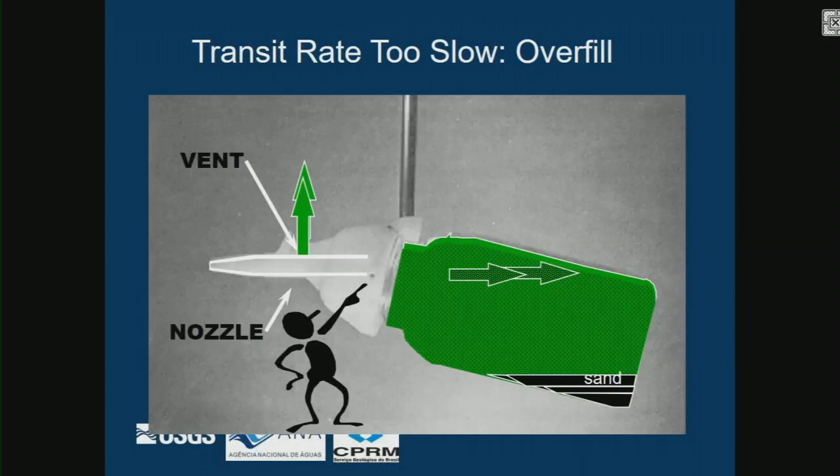What happens is you get water in here, the bottle fills up, and as more water comes in, the sediment drops out and you get clean water going out of that exhaust port or vent. So what you're essentially doing is losing clean water and concentrating the sediment in your sample. When you overfill, you get too high a concentration in your resulting sample. When you go too fast, the pressure is not able to equalize within the sample bottle relative to the outside.

You're getting insufficient sample coming in, and it's not representative of what's moving around the sampler. So ideally, all of those things would be in happy agreement with one another. You're not overfilling the bottle, but you're allowing the sampler enough time to equalize the pressure there as you're going, and you get a representative sample.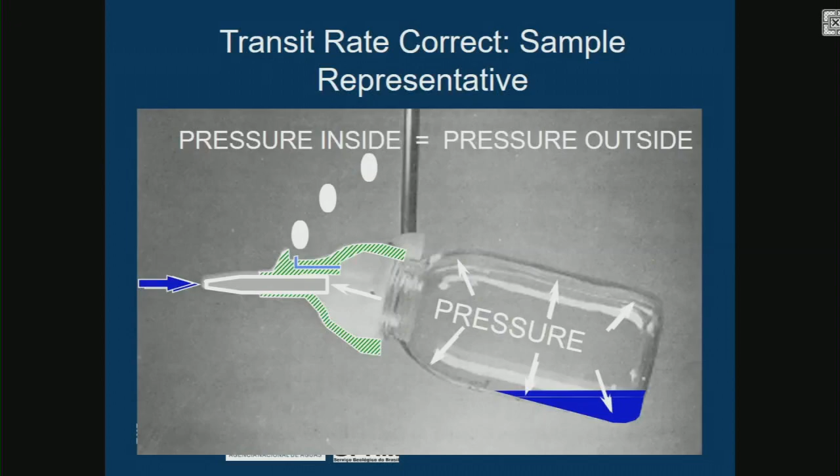So we have a series of tables that we rely on too. In addition to the graphs that Tim presented that show you the operational range, we also have these tables that we can follow. Each sampler and nozzle combination has its own table. We take these with us sometimes, and it's a table of the depth of the water. Our tables are in feet, of course. Then the stream velocity in the vertical is along the top.

So for, say, 10 feet of depth, with a D96 sampler, which has a 3-liter bag and a quarter inch nozzle, let's say we've got 6 feet per second velocities. Our transit rate can be anywhere between 0.4 and 2.4 feet per second to be able to operate that sampler isokinetically. It's a nice thing that we can take with us in the field.

All this kind of thing is embedded in Alvaro's Hydrosedimentos program, so you all have it way better than we do, I think. But the same concept applies: given your conditions, this is the operating transit rate that you can use at that vertical.

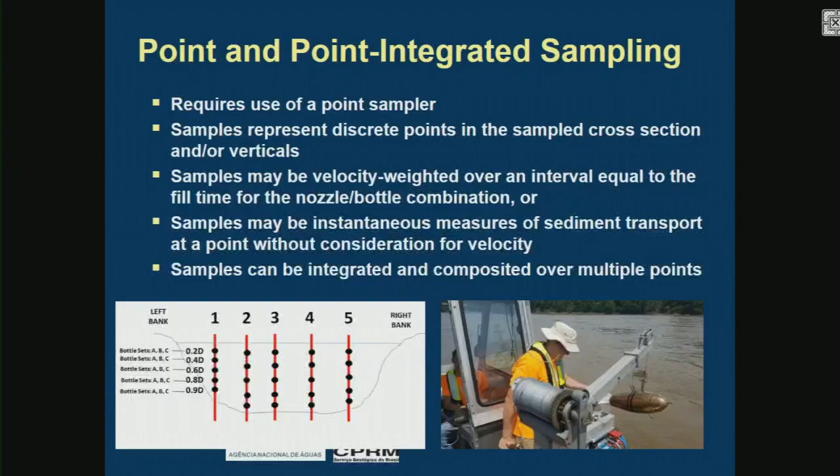So there are cases where we've mentioned that we have to collect samples that are not isokinetic. Either the velocity is too low, and typically that's when we have to do this—flow conditions, usually the velocity, or other circumstances, render our general depth integrated isokinetic samplers unusable. Generally this is when we're below the operating limit of each sampler, low velocities, and typically in those conditions, sediment is usually well mixed. Most of the types of sediment in transport are fine, real fine sediments that are generally considered well mixed anyway. The samples that we collect are not considered fully representative or integrated, but given that our depth integrated isokinetic samplers don't collect isokinetically at low velocities, this is the best that we can do.

These are a couple of types of equipment that we can use for those samples. This is a weighted bottle sampler, and it's just like a vessel or container that you put your sampling bottle in, and you lower it into the water using a rope or something like that. This looks like a PVC pipe that's threaded into this cap, so water is coming into the top of the bottle through the mouth here as you raise and lower it from the pipe.

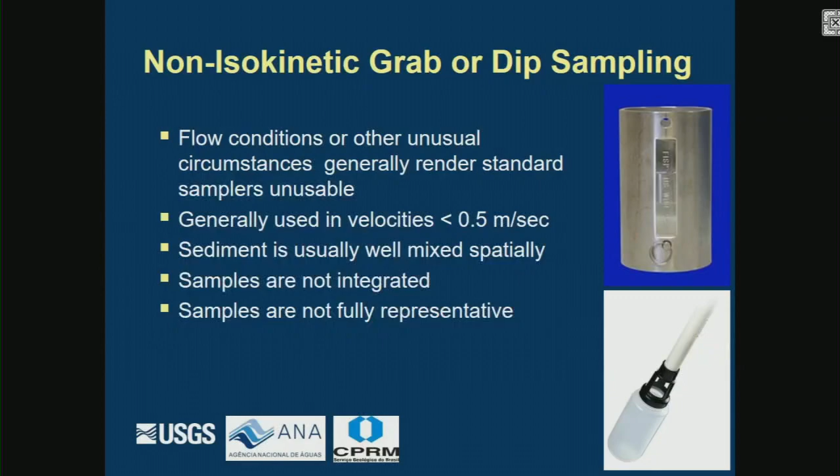So yeah, this is another example of that weighted bottle sampler. This looks like a pint bottle or a glass bottle with a cap on it that's got a little hole in the top. So they're collecting a depth integrated sample as it's being lowered and raised, but water is restricted a little bit because there's just a small hole in that cap to prevent it from overfilling before you can bring it back up.

So we talked about auto samplers or pump samplers. We use these very frequently in the USGS to collect samples when we can't be there, particularly at sites that have storm events causing rapid changes in flow and sediment transport. It's nice to have these automatically activated to collect samples throughout that event, so we don't have to be on site. We can go later to retrieve the bottles, process them, ship them to the lab, and get information throughout the event.

We can activate or trigger them to sample based on a set time interval, or water level, or flow, or if we've got a turbidity probe or something like that, we can trigger it or activate it based on that data.

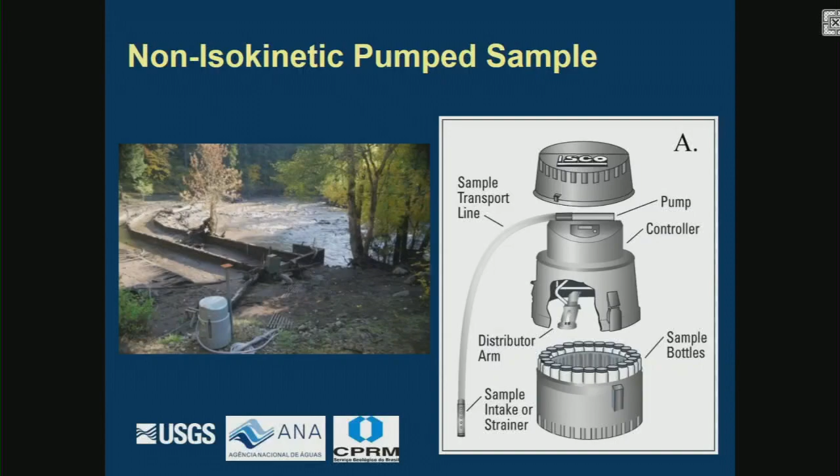So the concept of box coefficients: we consider these to be correction factors to convert the sample you would get at a single point or a single vertical to what the overall cross-section should be. We calculate them by dividing the cross-section concentration by the point concentration.

A typical approach for us would be, over a range of conditions, to go to the site at the times we would collect our full cross-section EWI or EDI, and at the same time force a sample from the pump sampler, or collect a single vertical. We analyze those two types of samples, then look at the concentrations and compare them to calculate the box coefficient. We would do that over a range of sediment and hydrologic conditions.

Once we understand how that relationship varies over a range of conditions, we can calculate the box coefficients and apply those corrections to every sample collected using the pump sampler or that single vertical. If that ratio, that coefficient, is always 1, that means the location where you're collecting your single vertical or pumped sample is completely representative of the average concentration in the cross-section. Usually it will vary a little bit.

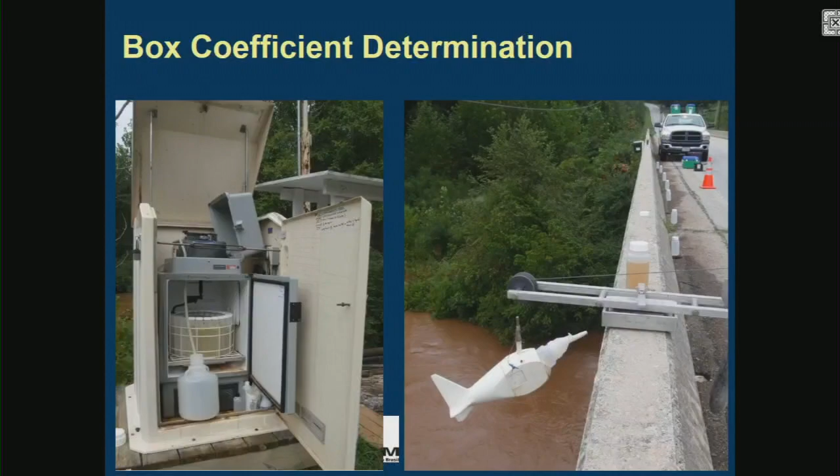This is an example of a site, the same site I showed previously, where they were collecting the EWI sample. They collected their EWI sample, and at the same time, forced the pump sampler to collect a separate sample so they could relate that value to the cross-section.

After we've collected those pairs of samples over a range, there are a number of ways we can look at how the box coefficient varies. The first step is typically to plot what the concentration was in that grab sample, single vertical, or pumped sample versus the full cross-section EWI or EDI, and see if there's a linear relationship between those two.

If we don't see a linear relationship over a range of conditions, we can look at how that ratio or coefficient varies over time, over seasons, or over flow. Sometimes the sediment distribution may change in your channel under different seasonal conditions. Maybe vegetation growing in certain parts of your channel changes the distribution, or the sediment sources are different in different seasons, causing a change in the response. Or at different flows, the relationship or distribution of sediment may change. These are additional things we can look at.

Once we have an idea of how that coefficient varies, whether it's constant over the range of conditions or changes over different seasons or flows, we can apply that correction factor to all of our point, grab, or pump sample data to get what it should have been if it were a full cross-section sample. That's a typical thing we do to maximize the types of samples we're able to get, while also making sure those are representative of the cross-section.

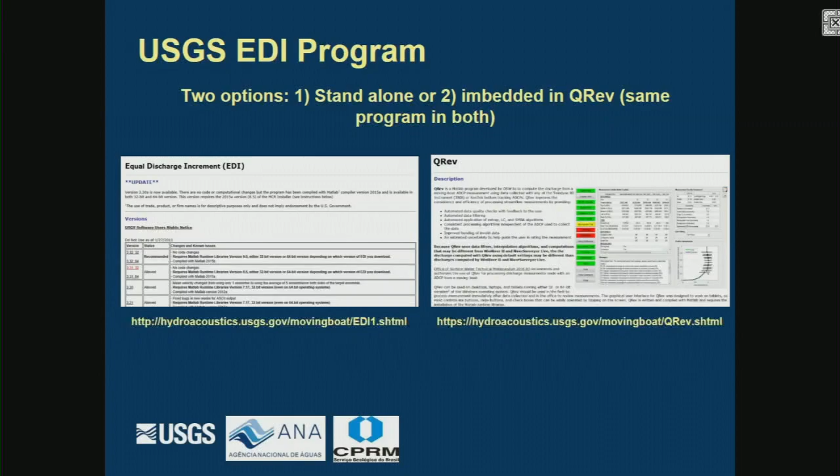How many people know what QRev is? Almost everybody. Good, good, okay. So now it's a little box in the corner. After you've processed your discharge measurement in QRev, you can click on that box and have it compute your EDI stations. This is a free program.

It was developed by Dave Mueller, and it was compiled originally with MATLAB, but now as Dave is changing to Python format, it will be a compiled Python program. It's compatible with RDI and SonTek ADCPs, but moving boat measurements only. So unfortunately, the ability to do flow tracker and current meter measurements is not something we have built in. It would be great to have that ability, as you have in Hydrosedimentos.

Okay, so the goal when we do it is we always want to try to maintain a straight line path when we're making our ADCP measurements. Then when we pull the measurement in and process it in QRev, this is the button we can click on, this EDI.

It allows you to select the transect that you want to use. This could be the one that you felt was the straightest transect possible. It doesn't matter if that transect starts on the left or the right bank. Once you pick the one you want to use, you click OK.

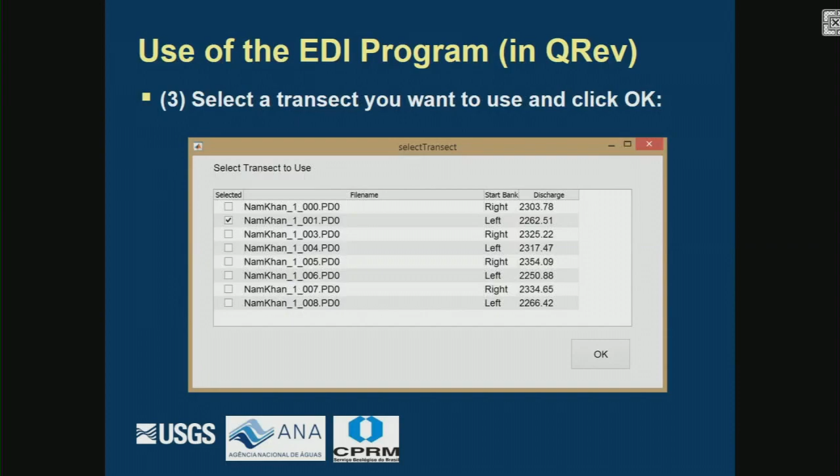And then a window will open. There is a box at the top that says 0 distance offset. If 0 wasn't the edge of water where you started your discharge measurement, you could put in an offset here. For example, if you were using a tagline and for some reason the edge of water was at 2 meters, or if you were on a bridge and the bridge stationing was not aligned with the edge of water, then you could add in an offset. But in general, most of the time, our offset is 0.

So you can enter that here, and then click Compute Stations. This will show you the location where you should sample. The middle of each 20% of discharge is at this distance from wherever you started that transect. It's going to have this depth, and it's going to have this velocity.

Unfortunately for us, we then have to go to the tables and cross-reference those conditions with our ideal transit rate. Well, Hydrosedimentos gives you that information right there, which is amazing. You're very lucky to have that program. If the ADCP had GPS equipped, it will give you stationing information for those locations. So if you had a GPS, you could go specifically to those locations, set a mark or a waypoint, and go exactly to that location to do your sampling.

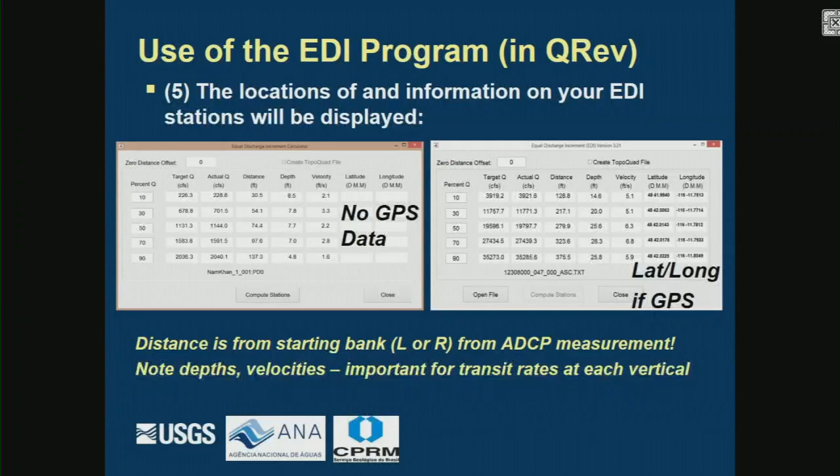This is an example from Mike, where instead of computing the EDI stations in the EDI program, sometimes they make a pass, a transect to determine the flow, and then go back and start the transect over, looking for the flow or discharge to increment to that 10%, 30%, and so on location as they go out to the channel. This is good for big rivers where it's hard to get right on that exact point and maintain station.

So they're just incrementing to the point where they have that flow, and then they set a waypoint in their GPS equipment that's on the boat. They mark those locations and store them, so every time they go back to the site with a similar flow condition, they can go right back to those same locations using the onboard GPS system on the boat.

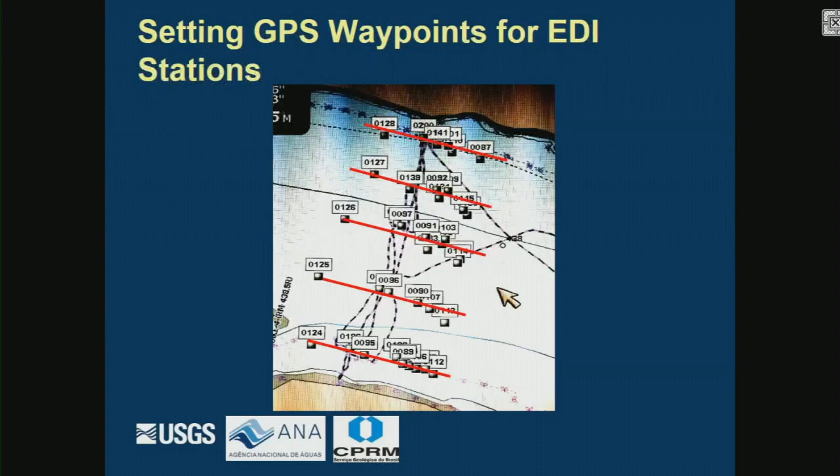I'm not going to go into all the limitations, but we are certainly not at the point that you all are with Hydrosedimentos. There's a lot we learn from you, and we hope to improve our programs based on what you've done, expanding our EDI program to accommodate more types of instruments and measurements, and giving transit rate information, which would be very valuable.